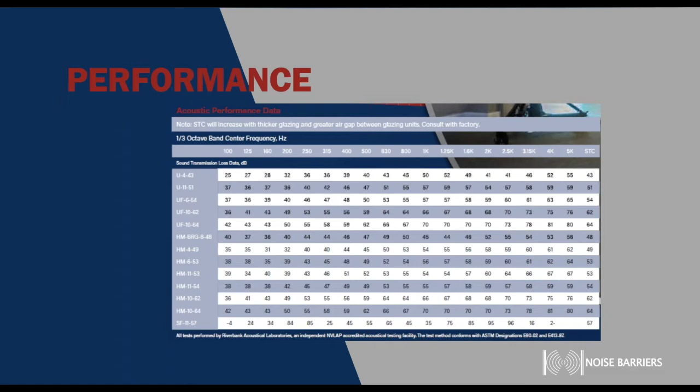The window components start from a 12 gauge frame. On all of our windows, we design those as a double window system, or two panes of glass — an inner pane and an outer pane. Between those there's a liner that we use for sound absorption between the layers of glazing. It's covered by perforated steel, typically always painted black, and the materials are foam. We can fabric wrap the fiberglass panels also, or do stretched fabric panels between the glass frames.

A lot of those components may be by others, where we're just supplying the components of the window assembly itself. In some cases we may add desiccant material, which is a hygroscopic substance used for drying out the windows if they're in a moisture-rich or high humidity climate.

Typically the glass is going to be called either glass or glazing, and then we also have our gasketing, which is designed to seal the glazing to the frame. In most cases we're going to add stops, or glass stops, which are small shims that keep the window separated from the metal frame. And then paint — we can offer it in prime paint or in a finish paint in any standard RAL powder coat color.

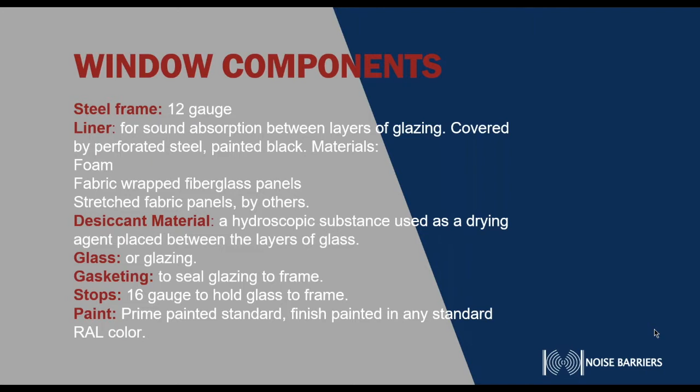Our QuietLite window options include our U-frame, the HM frame, which I mentioned, and the hollow metal split frame. We also have some inoperable window systems, we get into some inline metal systems, and we do a pretty vast array of aluminum frame sliding window systems also. The steel frames are always going to be factory assembled windows. HM is going to mean the hollow metal design, and that's indicative of all of these windows we're discussing today.

Double glazed, obviously, STC 43 to 64. There are four systems that are our standard designs. The U-frame, which is an applied glazing system around the frame or to each side of the frame — I'll show you an example of that. A fixed frame, which is our standard hollow metal frame, we call it, and those units are always glazed at the factory.

The split frame is a very unique piece because it's designed to wrap a wall or an opening in some cases, and they are not joined or glazed at the factory — it's something we glaze in the field. However, they're very nice for unique situations, maybe recording studios where we have extra wall depth, or we want to use those specialty fabrics between the two glazings.

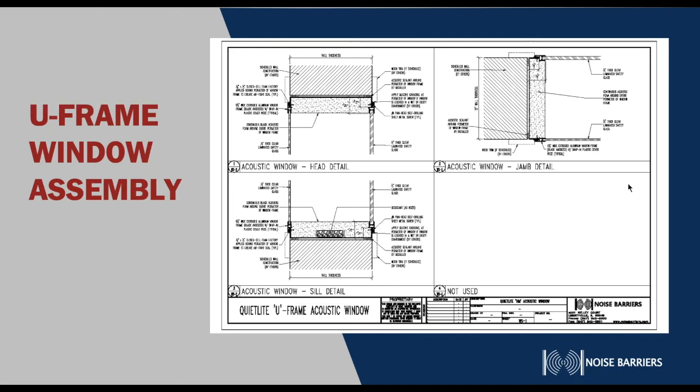Our hollow metal frame, which is probably our most popular window, is our pre-glazed system. As you can see, it's got 1-inch glass stops on either side of the glazing. As I mentioned prior, it has fill material inside or between the two glazings, and then the perforation. So we'll either have a fiberglass fill or a foam fill in that location, and then the black perforated metal would be between the two glazings.

These can be done for a single stud wall, double stud wall, very custom depths. In some cases, we can go up to 24-inch wide wall systems. And as we increase the depth of the window system, it is also going to increase the performance of the window at the same time.

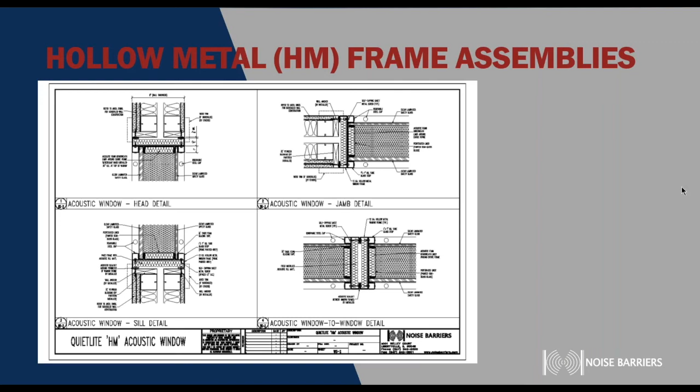Our split frame window is really 2 frames that get joined only by the perforated liner, and they can follow 2 separate window wall systems. So very unique in the industry. Currently, it's something we see used in a lot of studio applications or applications that would have maybe a wider or more unique separation in the wall types.

We also look at that where we want to wrap the wall to give it maybe a similar look to one of the hollow metal frames of a door or something similar. These are also very nice for installation because they can go into spaces that are a little less tolerant than what you would have in a hollow metal window, and be installed on site, collapse, surround that wall or cavity, and then the glazing goes in after.

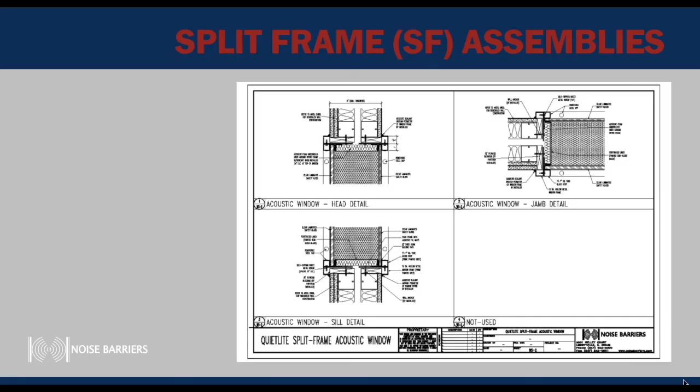We also can do the windows in a sloped configuration. In some cases, the acousticians may elect to have the windows slope either upwards or downwards, depending on what we're trying to reflect and what they're trying to reflect it to. Those can be anywhere from 3 degrees of slope all the way up through 7 degrees of slope. We can also double slope the glass if it's a more unique application. The only limitation is as we increase the slope, it's going to decrease the pocket or cavity between the two glazings, which can affect the STC rating.

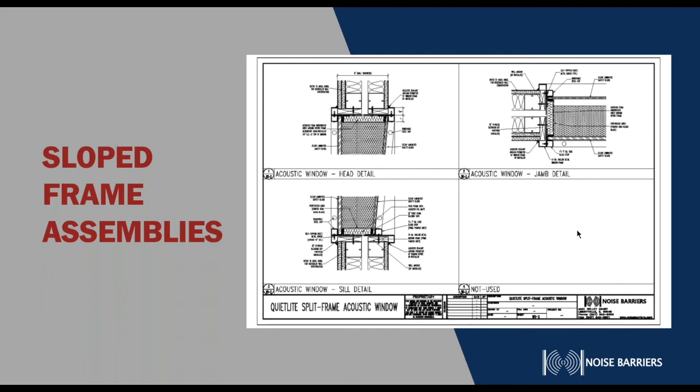On the prior STC rating chart, some of those glass thicknesses are selected because of a particular wall thickness. In some cases, we can change the glass thickness according to your particular wall construction. So say if we're wanting to meet an STC 53 with a 10-inch thick wall, it may be a quarter glass configuration, but if we want to go down to a 6-inch thick wall, then we may need to step up to a 1/2 and 3/8 glazing configuration to reach that same rating. That's all stuff that we do as salespeople within noise barriers, or our design engineers, looking at those various thicknesses to help meet your particular needs in the field.

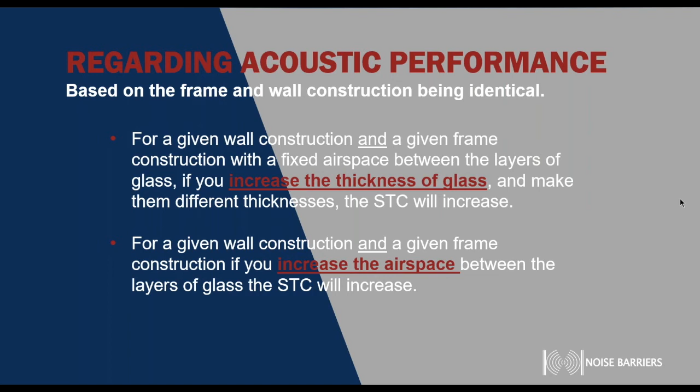So for any given wall construction and frame construction with a fixed airspace between the layers, if you increase the thickness of glass and make them different in thickness, the STC rating will increase. For a given wall construction and frame construction, if you increase the airspace between the layers of glass, the STC rating will also increase.

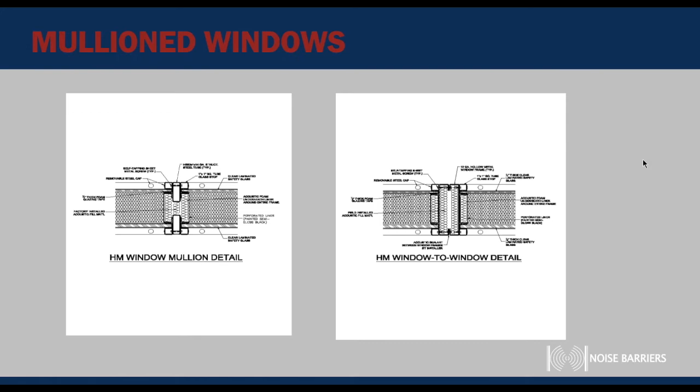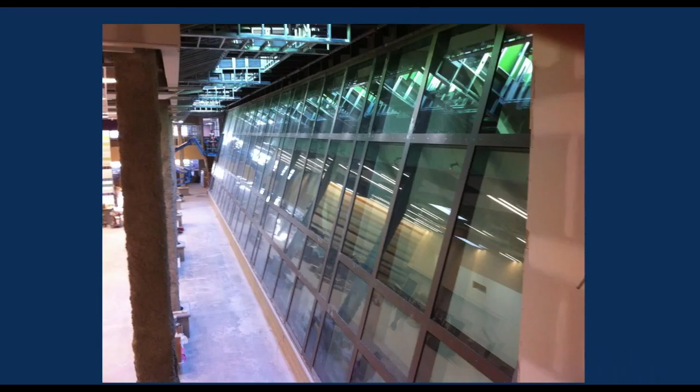This would be an example of a very custom system that we did. It is a window wall system, unique to our STC64 frame. If you notice, this window is going to be about 10 inches deep. It's kind of an optical illusion on what the actual thickness looks like, but the depth of those windows between the two glazings is 10 inches.

This is in a very unique U-frame that we have available, and then the system goes into a grid system and is dressed with metal channels or metal flashings around the system. Our STC 64 and 62 systems were tested as an assembly at the same time, so we know they perform extremely well, as we tested 3 modules in the laboratory. They're designed to go into a system similar to this or a wall system of your selection and perform extremely well in the field.